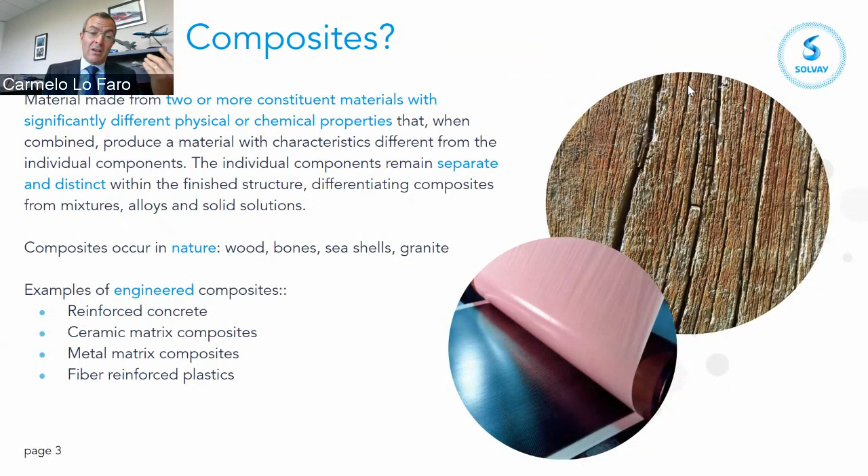Some examples of engineered composites, man-made composites that you see, are reinforced concrete, obviously a composite. And then you have different numbers of materials, with a ceramic matrix, a metal matrix, ultimately fiber reinforced plastics. That is what we'll talk about in today's talk. So the title of today's talk is a young technology. So let's talk a little bit about history.

And I want to compare and contrast the history of metals, a very commonly used material, to composites. Now, if you look at metals, metals in a form not too different from the form we see today have been around since the Copper Age. A copper pendant was found in what is now northern Iraq in 8700 before Christ, 10,000 years ago. Metals, of course, evolved through the Industrial Revolution with steel, aluminum, and ultimately titanium, that is a lightweight metal, in the 50s.

Now, composites have a different story. Technically, people used composites also many years ago. In ancient history, people used bricks made of straw, so fibers, and mud as a matrix to make bricks. In 3400 before Christ, Mesopotamians made some kind of plywood by gluing wood together.

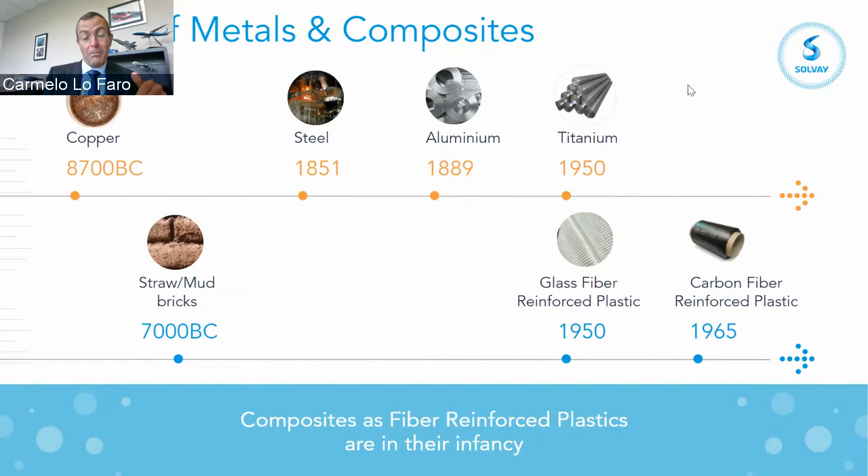However, when we think of the modern version of composites as fiber reinforced plastics, this is a technology that is in its infancy. So we started having glass fibers in the 50s and carbon fibers in the late 60s. So compared to metal, composites are a very young technology that has a lot of potential. So let me talk about composites as in fiber reinforced plastics today and compare them to metal.

Clearly, composites continue to replace metals in multiple applications. Why is that? There are some very obvious reasons. I would tell you these are the traditional reasons composites are replacing metal. The first one is the one almost everybody is familiar with.

Composites have a very high specific strength, so that's the strength to weight ratio, and the stiffness. Now, just to give you some figures, carbon fiber composites are 25% the weight of steel, 70% the weight of aluminum, and they have 4 to 6 times higher specific strength than these two metals. So that allows people to make lightweight structures.

Another advantage is no corrosion. Metals corrode a lot, and the ability to be dimensionally stable. That allows composites to withstand very tough environments. Fatigue. Composites do not have a fatigue problem.

I pasted a picture here of a pretty infamous aerospace incident. So this is Aloha Flight 243 in 1988. This was a 737-200 plane with a metal fuselage that suffered an explosive decompression at 24,000 feet over the Hawaii Islands.

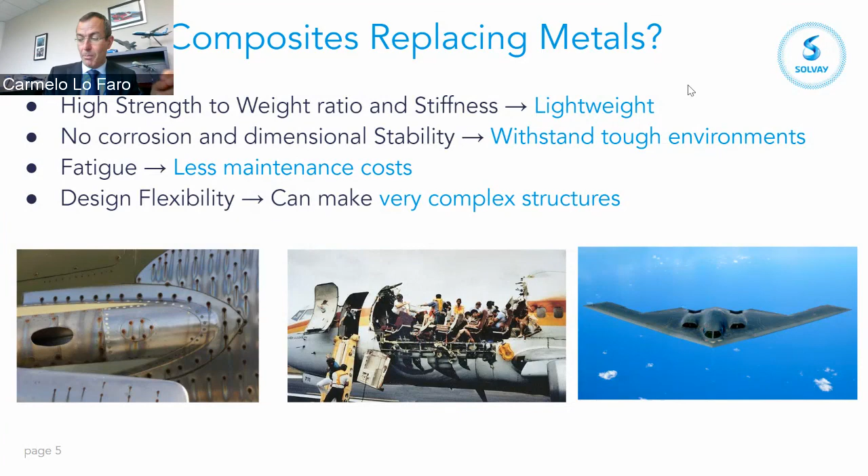So now, let me tell you about how these advantages of composites have helped the technology earn their way into a number of modern applications. Now, I'll start with aerospace, defense, and space. So we'll talk more about this industry today. These are the industries where composites have really found a very fertile ground.

And the reason is that all the advantages I described before, the ability to reduce weight, the resistance to corrosion, fatigue, tough environments, rapid changes in temperature, and the need for aerodynamic design really created a perfect opportunity for composites.

So I'll talk a little bit later about the evolution of applications and how composites moved from making some secondary structures all the way to wings and fuselages of large commercial airplanes. But that's obviously the place where the advantages are.

Composites are used in marine, America's Cup boats. Obviously, lightweight and stiffness are very important in these types of sports where it's really important to achieve the best performance. Likewise, talking about sport, motorsport, and luxury cars, supercars.

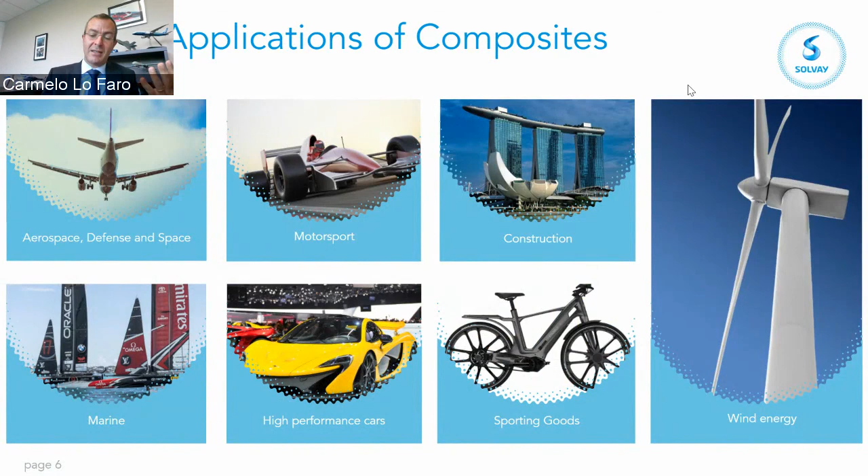Another example of application is in wind energy. Obviously, sustainable, clean energy that is being used more and more in the world. These blades need to be light, need to be stiff. Some of the offshore blades are extremely long and need very high stiffness. Again, that's another area where composites play a role.

So what does a composite look like? So these are some optical micrographs of the cross-section of a composite material. And specifically in this case, a carbon fiber composite. And I would like to highlight a few features about the composite.

The first one is the layered structure. So you have multiple layers. These layers can range in thickness from 100 micron all the way to 200, 300 micron.

You have fibers in multiple directions. So as you can see from the picture, there are fibers coming out of the screen, and there are fibers going transversally at 90-degree direction, and fibers going at an angle, plus minus 45.

So that's what we call a quasi-isotropic layout. If you look at the two bottom pictures, you can actually distinguish the resin, that is what you see being dark, close to black in the picture, and the actual fibers. These are carbon fiber yarns that are made by thousands of individual filaments, each of which has a diameter of about 5 to 6 microns, depending on the fiber. So obviously a very, very unique material, also when we look at its microstructure.

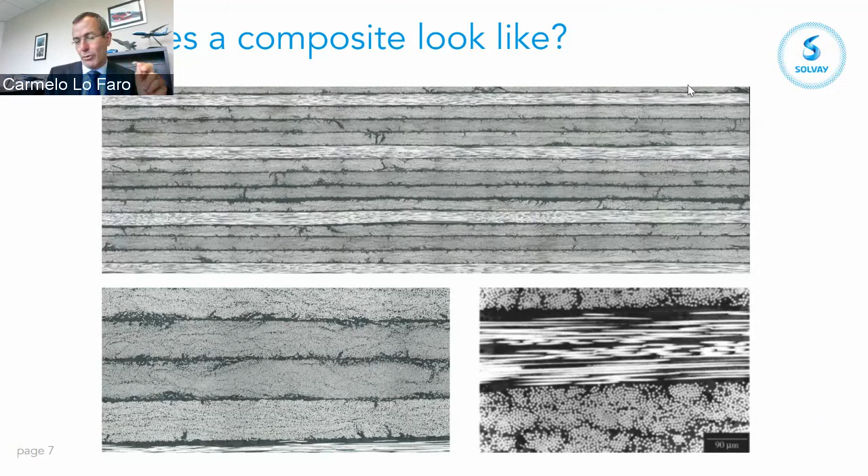But now let me share a couple of other reasons composites are unique, reasons that are a bit less intuitive, maybe. The first reason is the way you manufacture parts with composites. On the left-hand side of the slide, you can see one of the typical ways of manufacturing parts with metal. Start with a big block of metal, and you machine a lot of metal away to make a part. This is subtractive manufacturing, and typically when you use machining for metal, you are taking out up to 90% of the original material. So what our aerospace customers call the buy-to-fly ratio is not very good. They buy a lot of metal, they can only use 10% of it in a part.

Yes, there are other techniques to manufacture metal structures, such as forging or casting, but in general, metals are not manufactured through addition. Composites are. That's why I like to say that composites have been one of the very first examples of additive layer manufacturing. Now, I hope you can visualize this. I was hoping to show you a video, but I didn't trust the technology to do that.

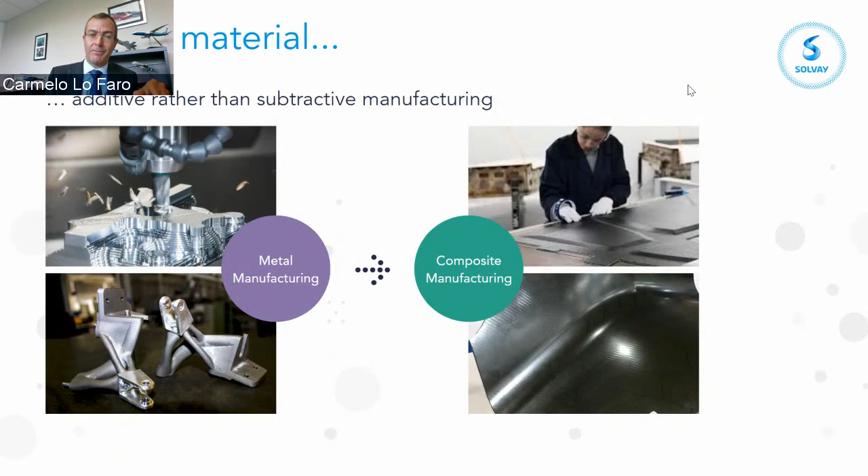Now, another uniqueness of composites is that, I like to say, you build the material as you build the part. This happens at the same time. If you think of the example I just gave, we start with material that is soft and sticky, we lay it down, put it in an oven, and ultimately the material is built together with the part. There are not too many other examples where that happens. On top of that, there is a very intimate relationship between the design, the materials, and the manufacturing process.

So you hear a lot of talk about design for manufacturing. Design for manufacturing is extremely important for composite materials because of this reason. And it's also very important to have a clear understanding and dialogue between designers, material scientists, and manufacturing engineers. In my experience, this is absolutely the best way to truly deliver the potential of composites, and not just mimic metals, but be able to design with the material and the process in mind.

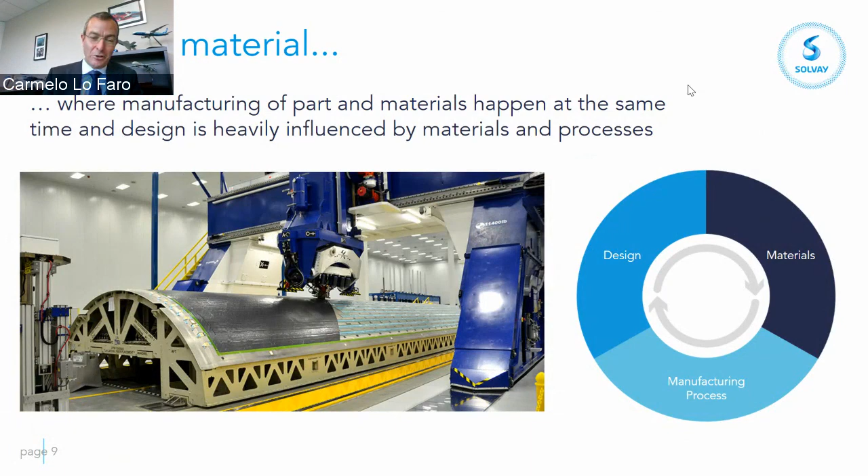Now, GTMI is a manufacturing institute, so I absolutely want to talk about manufacturing. Let me start with some very simple examples of how you manufacture composites, and then I'll deep dive a little bit. There are many processes and variants of these processes that are used today to make composites. I'm not going to cover all of them, but I will give you a bit of a high-level flavor of how composites manufacturing has evolved over the years.

Early composite structures were manufactured using wet layup. It's a technique that today is still used to make certain structures like large boats. Now, that's a pretty crude manufacturing technique. You have a bucket of resin, you have a dry fabric with fibers in it, you lay down the fabric, you try and hold it together, and then pour down the resin and use some tools to impregnate it. Then that structure gets cured.

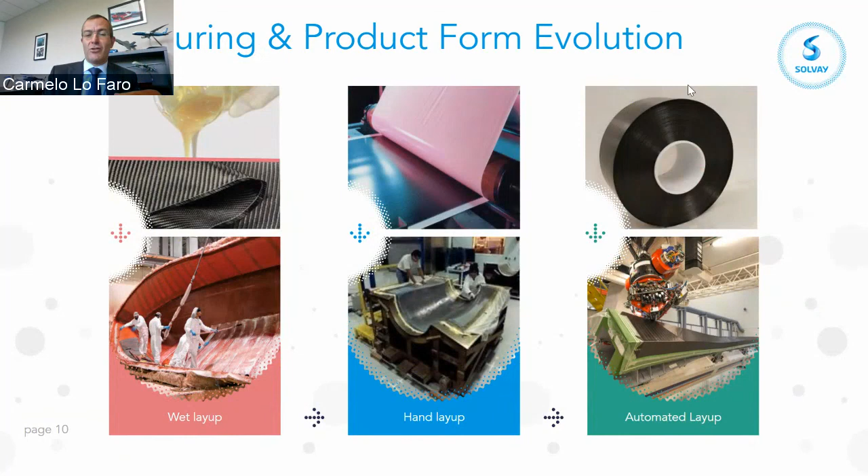Companies like ourselves developed toughened epoxy resins that would allow us to have a resin with the ability to improve the damage tolerance, and chemistries that could enable higher temperature performance and better mechanical performance, like bismaleimide. So a lot of evolution on the material side.

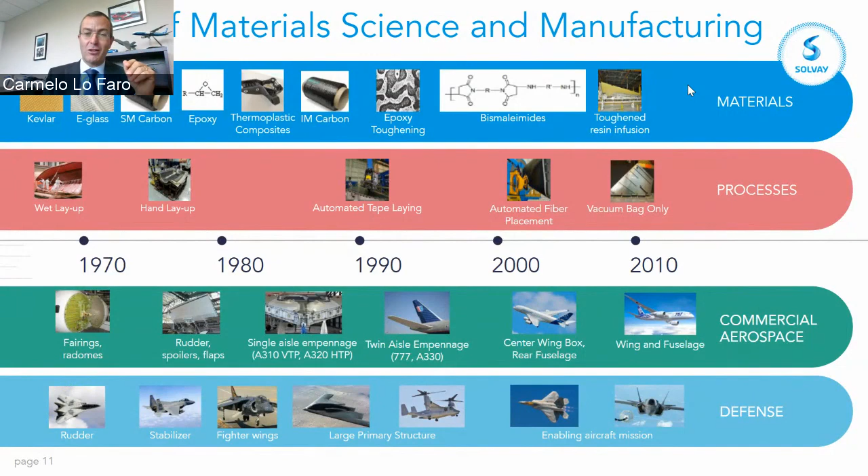So what's next? What's next for composites? I shared until now a bit of the history, the yesterday and the today. I tried to tell you a lot about the potential and the advantages of composites. So what can happen next? Well, it is very clear to me and to the industry that composites can be an absolute enabler for multiple frontiers of progress in multiple markets.

Now take electric vehicles, cars, or even planes. Again, some of the advantages of composites, the ability to make very flexible types of shapes, the lightweight, the stiffness, are clear enablers for vehicles that need to carry a heavy battery and therefore need to be light. Hydrogen propulsion. There have been a lot of talks recently about hydrogen propulsion for both land vehicles and aerospace. Again, composites can really help.

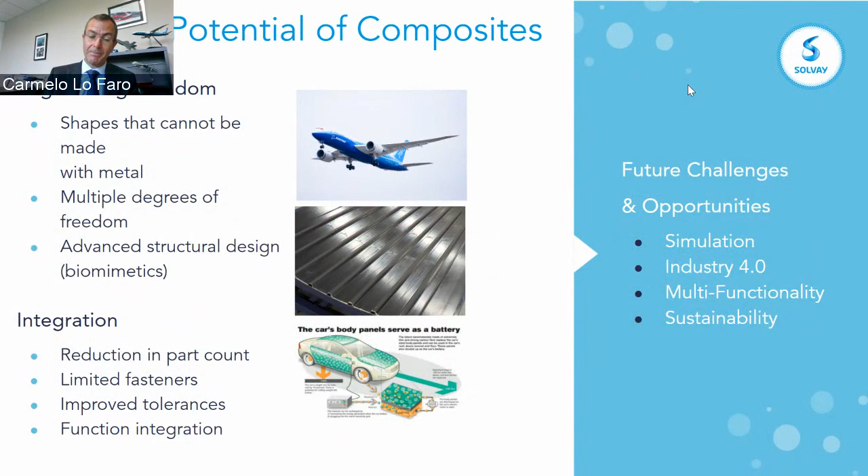Composites have an interesting dilemma on sustainability. They are a very good product to help sustainability because they are lightweight. So a plane made in composites consumes a lot less fuel than a plane made with metal, and the same is true for a car. However, composites are not easy to recycle. So there is a clear challenge and opportunity that we can exploit. So let me talk about those four areas.

So let's start with simulation and modeling. I shared in the previous slide that the key advantage of composites is the multiple degrees of freedom. Right? Many layers, many different fibers. As a designer, you have all the freedom you need. However, of course, all these degrees of freedom create challenges as it pertains to designing a structure, analyzing a structure, and ultimately certifying a structure. That is a very important problem in aerospace where structures need certification.

Now, we're very lucky today, because computational power has really increased. And you've probably seen many of these charts that show the evolution of computational power. Now, there is a clear belief we will surpass the power of a single human brain in 2025 and potentially hit a technological singularity and surpass all the human brain power in the next 20 to 25 years. So we need to use this power.

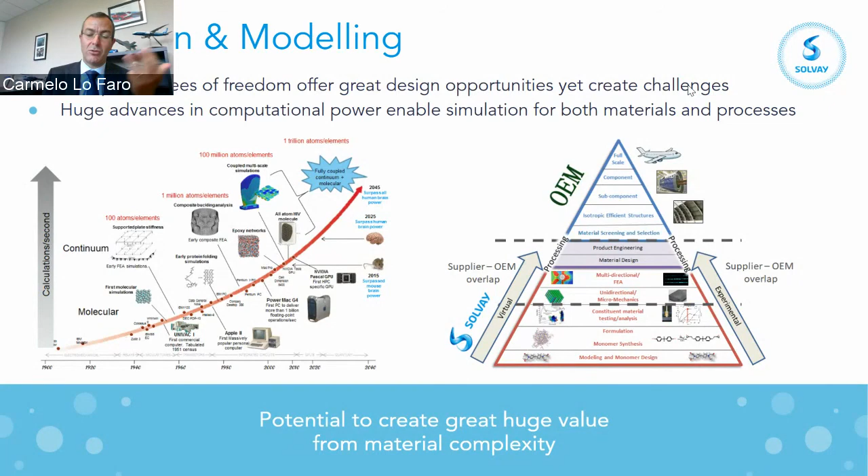Now, let me talk about multifunctionality. So I said before that with composites, you can use multiple functions and you can integrate. Now, when we look at the evolution of composites, yesterday, composite structures were what we would call monoskilled. Their job was to carry a load. Today, we are able to use composites with a number of enhanced physical, so thermal and mechanical, properties that can reduce weight and avoid corrosion, etc. The big potential for tomorrow is to use composites to provide additional functionalities.

And why is that important? Because the moment you are able to integrate multiple functions within the material and the structure, you are saving both weight and cost. There are fewer components to bring together, and there is overall a lower weight. To give you some examples, acoustic and vibrational damping. It is possible to introduce certain features within the composites that allow us to tailor the damping properties of the composites.

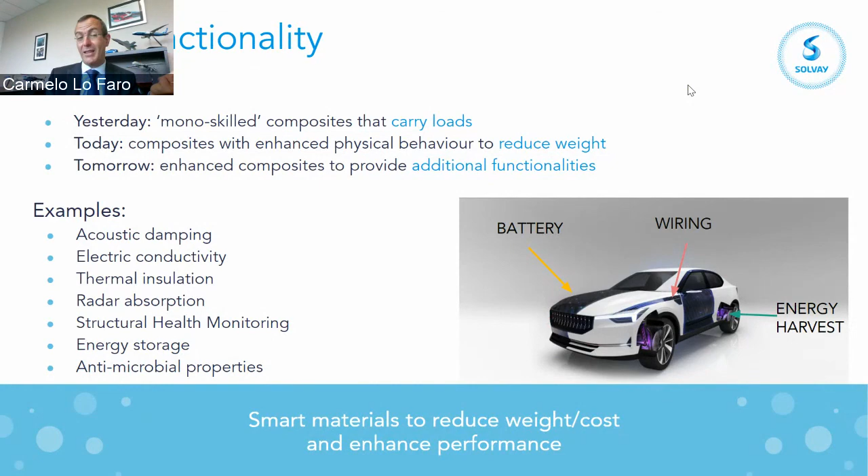Structural health monitoring and the ability to treat a structure like a human being. If a structure is damaged, you are able to send a signal and you know that. Storing energy. And then last but not least, I couldn't do this talk without mentioning COVID once, antimicrobial properties. Obviously, that's something else that can be integrated in a structure and avoid additional cost or weight. So lots of opportunity in multifunction.

Now, manufacturing. I absolutely believe, and so do the people who have used composites a lot, that composites can make processes simpler and can lower cost, because you can integrate, because you need less expensive tooling and less expensive machines. However, today, a lot of people, especially those who are not familiar with composites, have a perception that composites manufacturing is not a science and requires a lot of brute force. Now, that's true in a lot of cases, and it doesn't need to be that way.

Again, there are a number of technologies that can help fully exploit composites. Advanced process monitoring, statistical process control, not to mention artificial intelligence and machine learning. You can just think, again, of everything I said before and the inherent complexity of composites and manufacturing. The use of artificial intelligence and machine learning can help improve the design, the quality, productivity, and even the supply chain. So lots of opportunities.

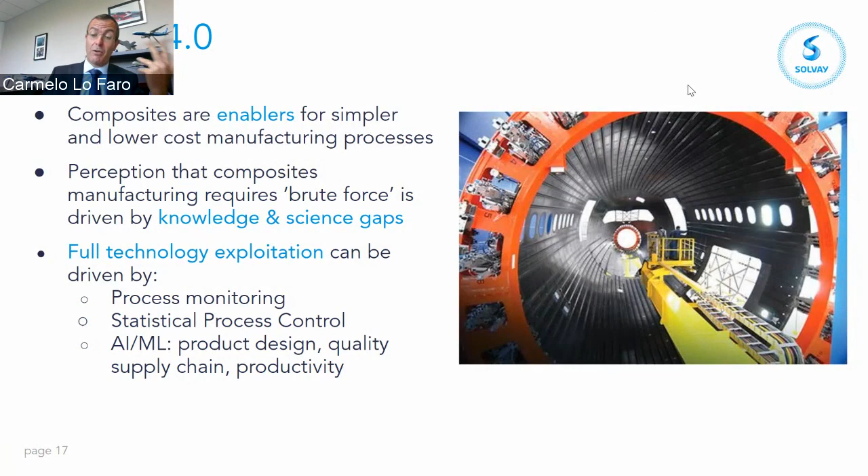Sustainability. So I shared before the paradox of composites. Lightweight, you consume less fuel, so very sustainable technology. However, today it's very hard to recycle composites, and composites are by and large still derived from oil. So what are the opportunities there? You look at carbon fibers. There are opportunities to manufacture carbon fiber using sustainably derived acrylonitrile, that is a key ingredient or the precursor of carbon fibers. Now, we worked on a project with the Department of Energy to make acrylonitrile from biomass.

Carbon fiber production requires lots of energy because you need to take fibers and you need to heat them at very high temperature for a very long time. How can we do that with low energy? Resins. Can we look at having monomers that are derived in a sustainable way? Recycling. Again, today, especially with thermoset composites, there are only very crude and inelegant ways of recycling composites. A thermoset, by definition, is set, so it's not easy to go back to the original component. So what people do today is they will burn the thermoset, use a pyrolysis process, and then recycle what's left. Not very elegant, not very efficient.

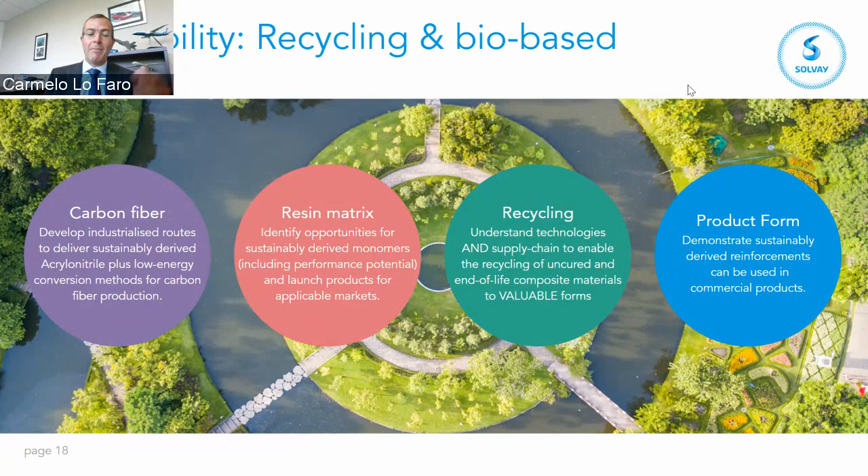Now let me conclude, and I want to conclude this talk talking about talent, talking about people. One of my mentors once told me, everything you will see in life is about people. So let's talk about what talent can do in this field. So I hope to have convinced you by now that composites have a huge and very exciting potential. And this is a potential that today is sometimes feared. And I believe this potential can be embraced.

Don't be afraid of multiple degrees of freedom creating complexity. Use that. Don't be afraid that manufacturing is not as efficient as it could be. Leverage that. And the way to do that is very simply multidisciplinary expertise. The future of a technology like composites goes beyond chemistry and engineering. As you have seen in this presentation, you probably noticed how many sciences and disciplines can be of help to composites: digital, computational science, physics. I really believe that most, if not everything, of what you are studying today is relevant to composites.

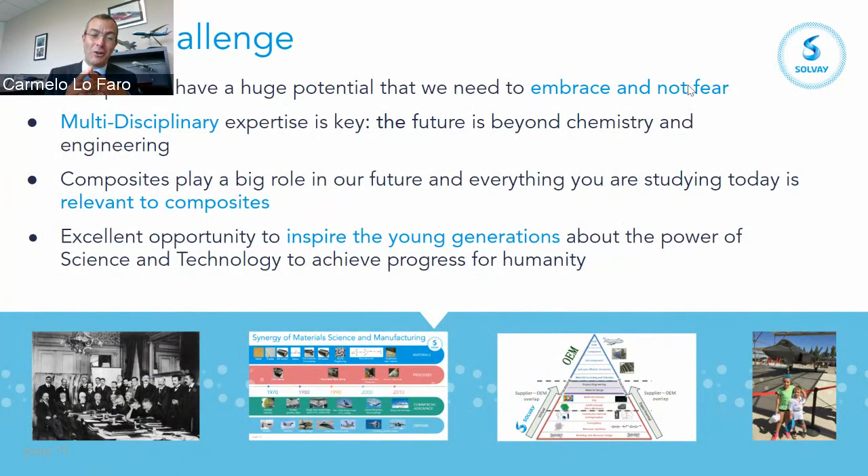And so, to conclude, I put some pictures here to tell you a bit of the story I wanted to cover in this talk. We started with a picture of the physics conference, the great scientists that made possible a lot of the progress that we have today in the last century. I spoke about the evolution of composites, and I have at the bottom a picture of my children that was taken a few years ago in front of an F-35. It is an all-composites plane made with a Solvay material. I absolutely believe in the need to inspire the young generation about science and technology.

Very importantly, about the ability of science and technology to achieve progress for all of us and for humanity as a whole. This is what the founder of Solvay believed in. This is what I personally believe in.

So for me today, it's a real pleasure to talk to an academic institution like Georgia Tech and to have the honor to have all of you listening to this, because I hope that you can take something from this and use it to be inspired and to inspire the new generation of scientists and technologists, because there is a lot that can be done. Composites is a great area for that, but we definitely need a lot more of that. And with this, I'd like to conclude and go to Q&A.